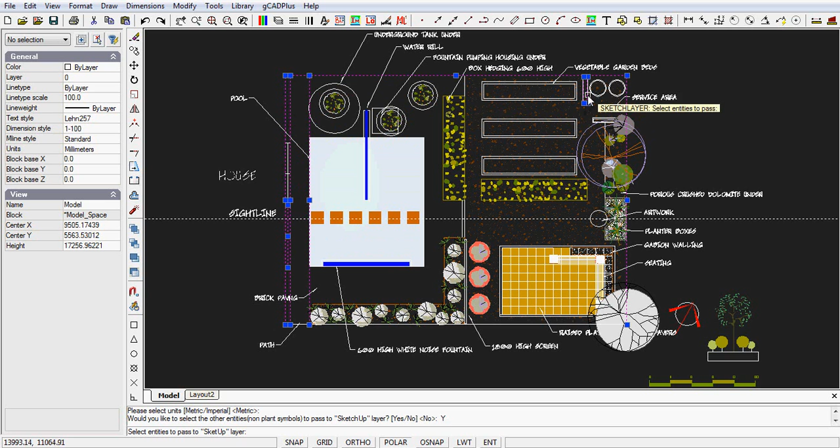Now we ask to select the entities that we want to pass to the SketchUp layer. So I simply click on all the entities that I want to pass. I clearly want the boundaries. I might well want this area at the back of the site for screening and for recycling of materials and so on. I want the garden bed edges, so I can pick those. As it stands at the moment, we don't have a window tool to allow you to put windows around things, so it becomes a little tedious because we have to select every entity.

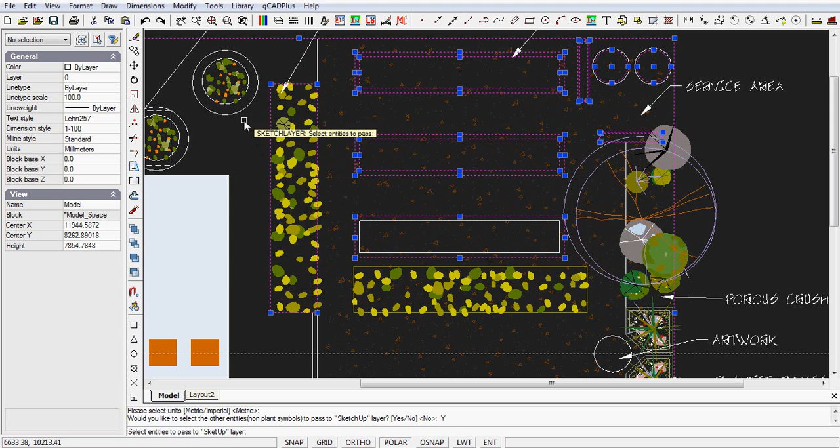Now in the SketchUp environment, it's pretty easy to build this 3D symbol and just copy it down. So I might just take a couple of entities to save myself some time in clicking, and I'll just take one rectangle. I might want this one and those, picking elements that will help me build a 3D design. I'm making the movie while doing this, so I may well make the odd mistake, but we want the plinth or paved area there.

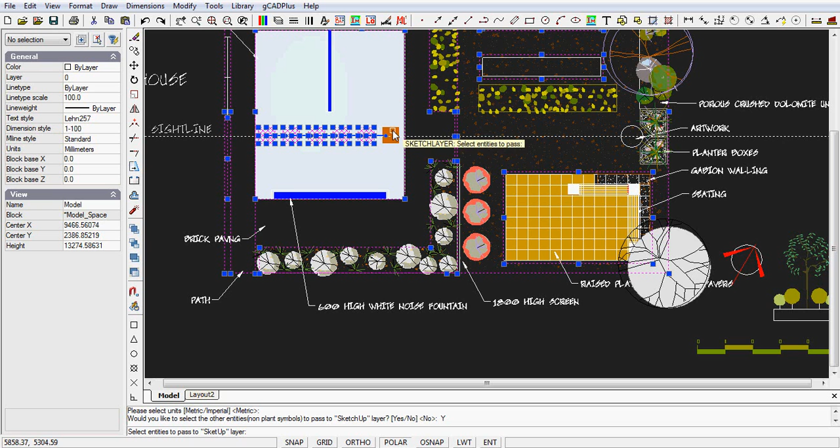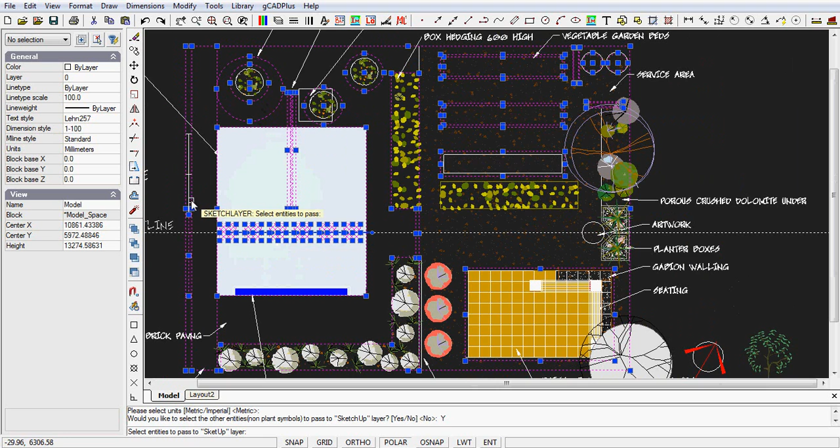We certainly want this, it represents a pool, and there's some solid concrete blocks placed on the base of the pool. There's a water rill running through the center there, and we're going to need those entities. There's a tank here underneath an area that we want. That's going to be a planter box or planter tub, and I've just missed there, so from my point of view, that's probably enough. I've got most of the entities selected now, which will help me build a 3D model.

What I have avoided is taking all of the symbols and all the text there, because if that goes into the SketchUp environment, things get a little tricky. It's harder to build a 3D model.

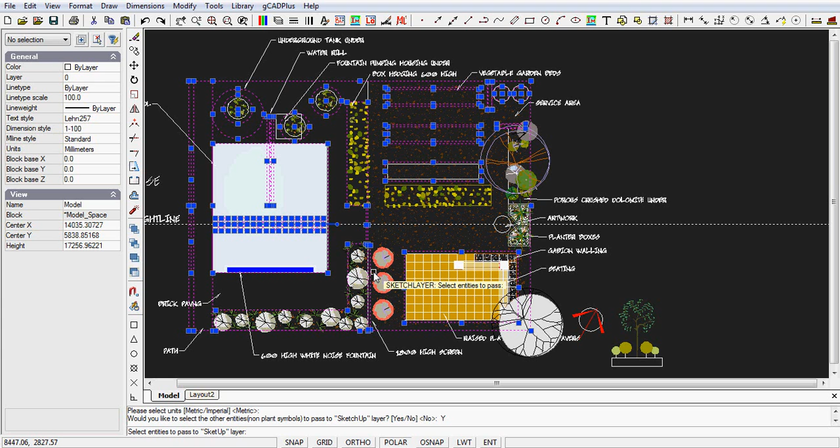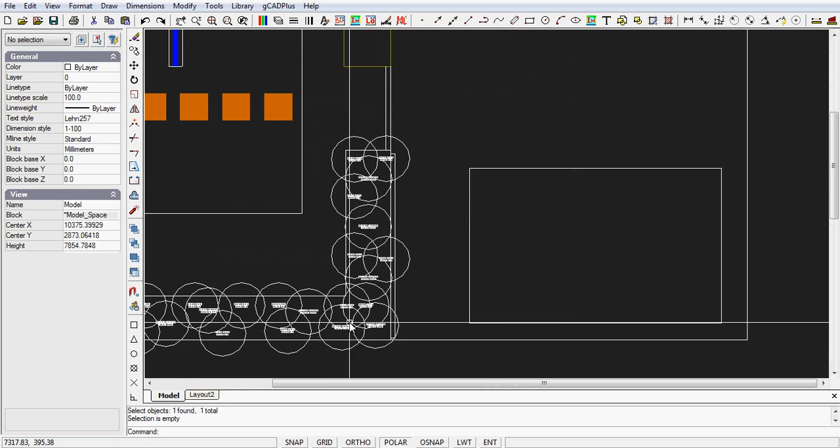So I've done that, and I hit the Enter key, and what's happened is that if we now select here, this has been moved onto a layer called SketchUp. All those elements that I selected have been moved onto a layer called SketchUp, and circles that represent the species I've specified, and the diameter of the specimen, have also been moved automatically across to that layer. So that selects that.

What we've now got is a really simple view. If I move into the stack of layers, you can see all the layers I was using in this drawing have been turned off, and the only layers left on are a layer called SketchUp and a layer called SketchUp text. So if I didn't want to take the text, I could just turn that layer off.

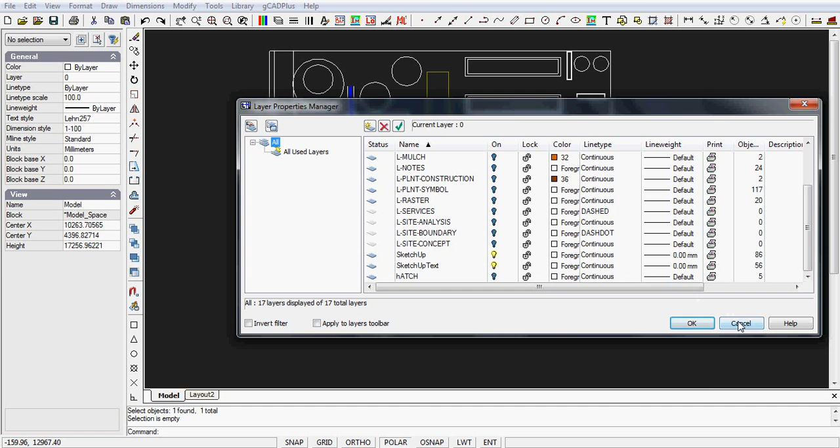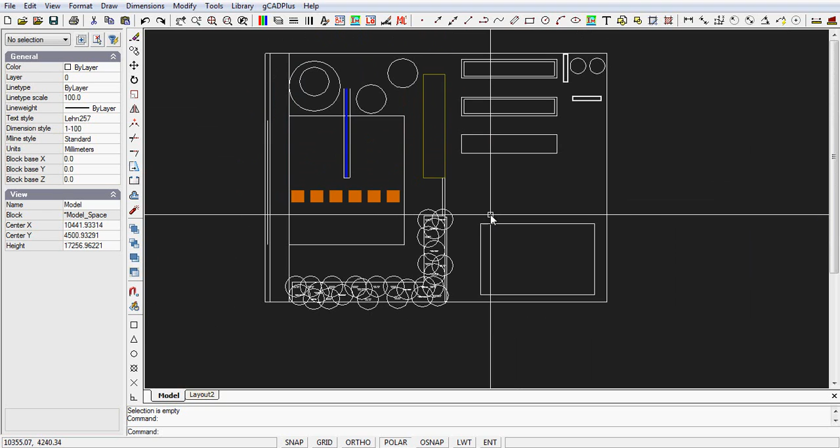But the text is useful to me because that's where the flamingo flower is going to go, and what I'd be searching for in the SketchUp warehouse is a plant that's sympathetic, a 3D symbol sympathetic to that. So we've got a really clean and elegant drawing here, hardly any space. It's not going to be cluttered, and it'll be a simple matter to take this and use the push-pull tool in SketchUp to build our 3D model.